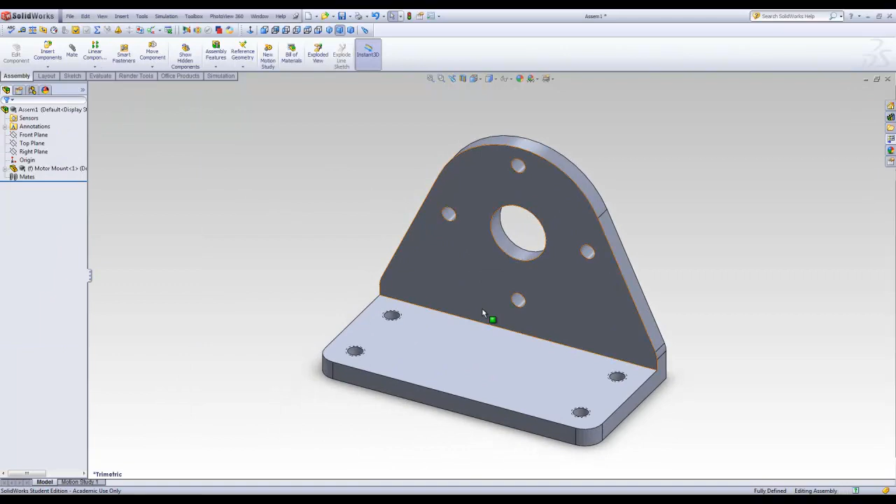Now what we're going to do is insert the motor by clicking Insert Components, Browse, finding our motor, and then clicking somewhere in the assembly.

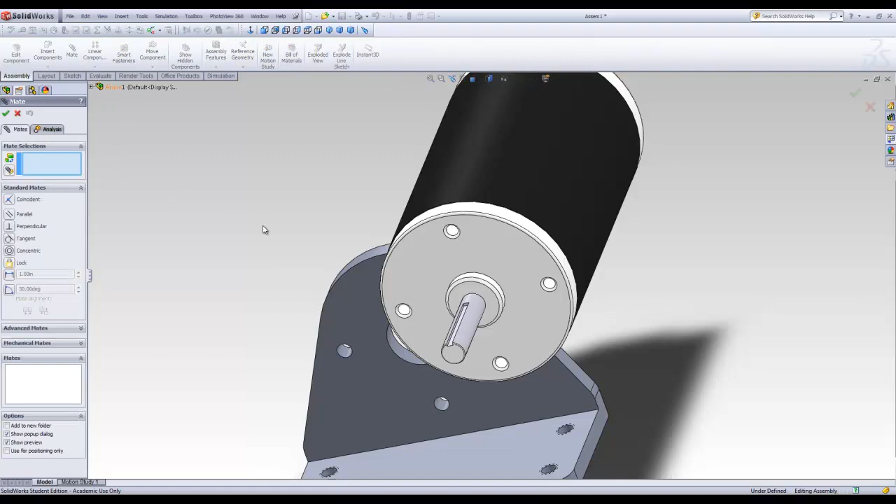In order to constrain our motor to one position, we're going to use mates. So click on Mate, and what mates do is join two bodies together. So if we click this surface and this surface, it's going to make it coplanar with each other.

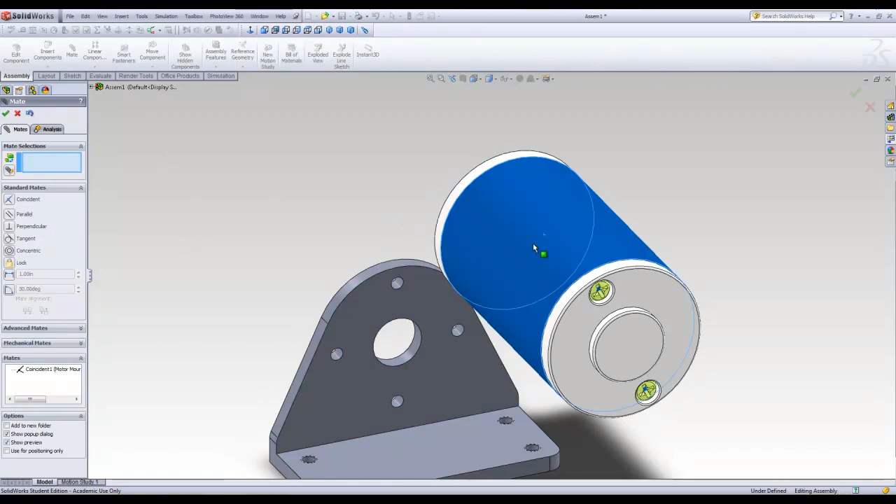You'll notice that our motor is going the wrong direction, so we want to hit anti-aligned, and that will flip it around. We want to hit the check mark, and now our motor is lined up much as it would be if we were actually screwing this into a piece of metal.

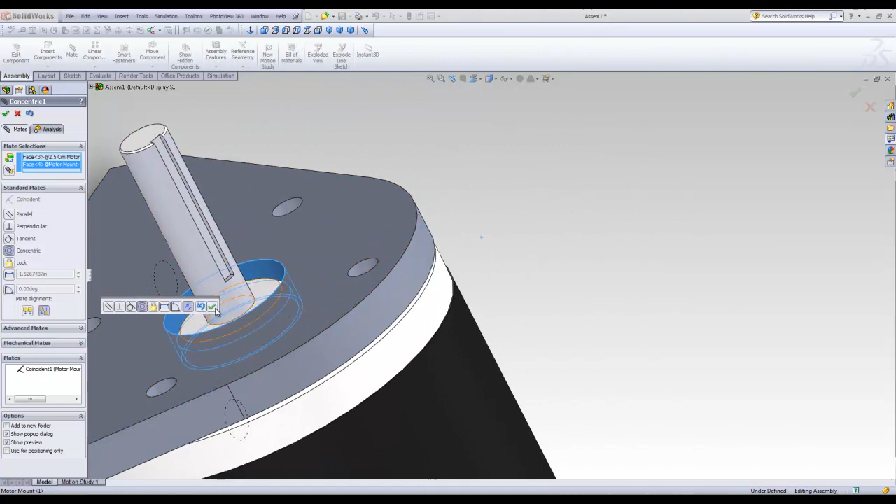To finalize the position, we want to click on the cylindrical surface on the boss on the motor, and then click the cylindrical surface of our center hole, and this will create a concentric constraint, so our motor is now centered with our mount.

To finish off the position, we want to click and drag on the cylindrical face on our motor until we get roughly lined up with our mounting holes. Then do the same thing again with the cylindrical faces and create another concentric constraint.

Our motor is now fully defined in our assembly, and it will not move. To finish our assembly, we need to add some screws.

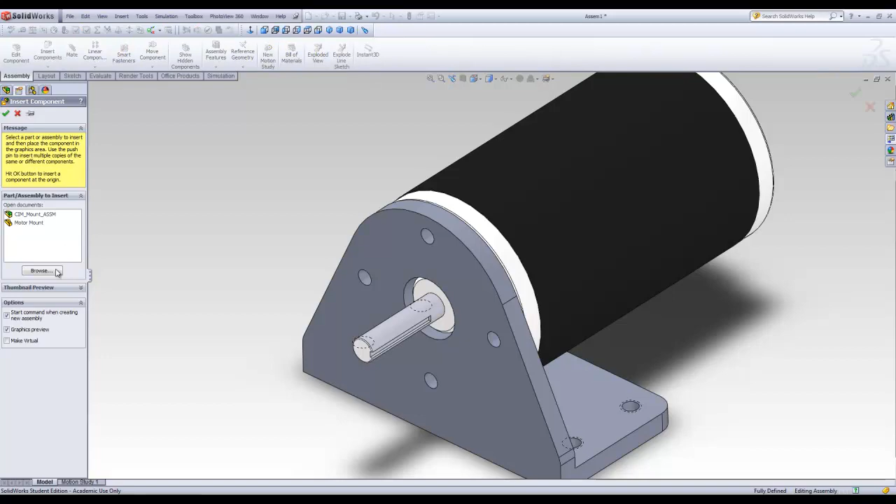So we're going to hit Insert Components and Browse again. Then we're going to add our screws. We need to click this push pin so that our Insert Component tab doesn't go away when we add more than one. So we're going to add 4 and hit the check mark and go back to Mate.

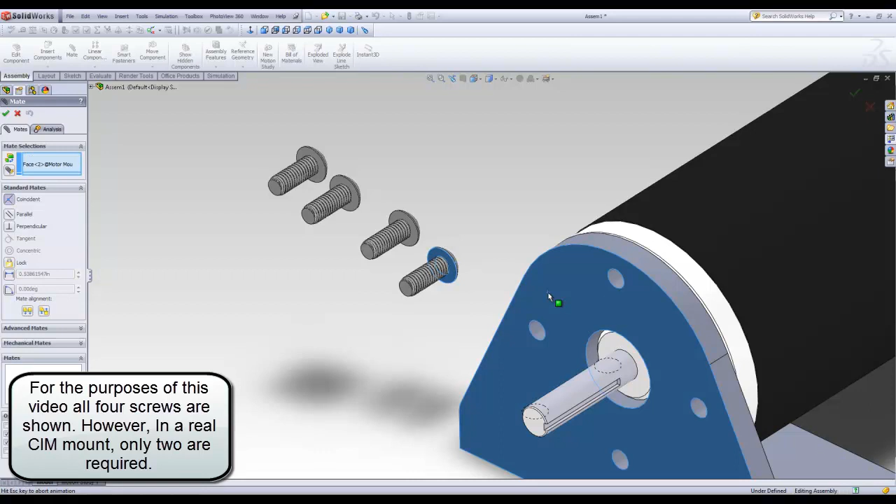Now what we're going to do is click on the bottom face of the head, and then click on the outer face on the mount, and then hit anti-align so it flips it around. We're going to do that 4 times.

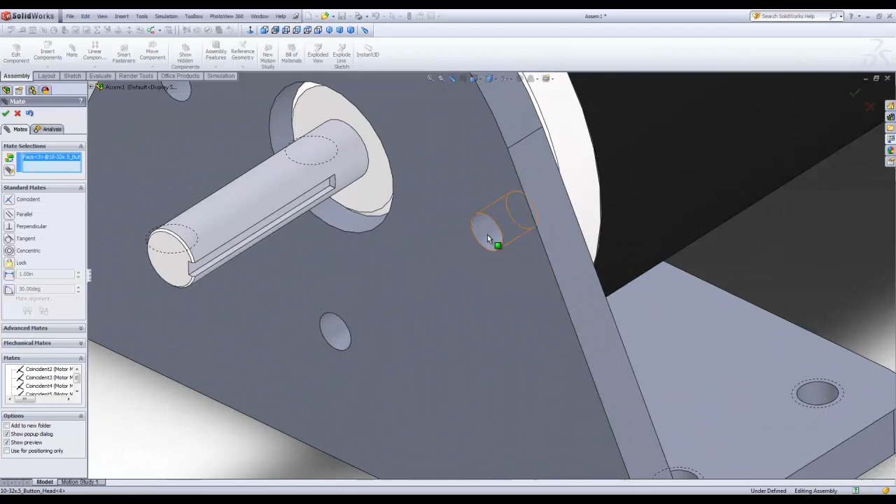Now all we have to do is click any circular surface on the motor and then line it up with a hole. And that will place our screws much as they would be if they were actually being screwed into our assembly.

Oops, I accidentally hit back.

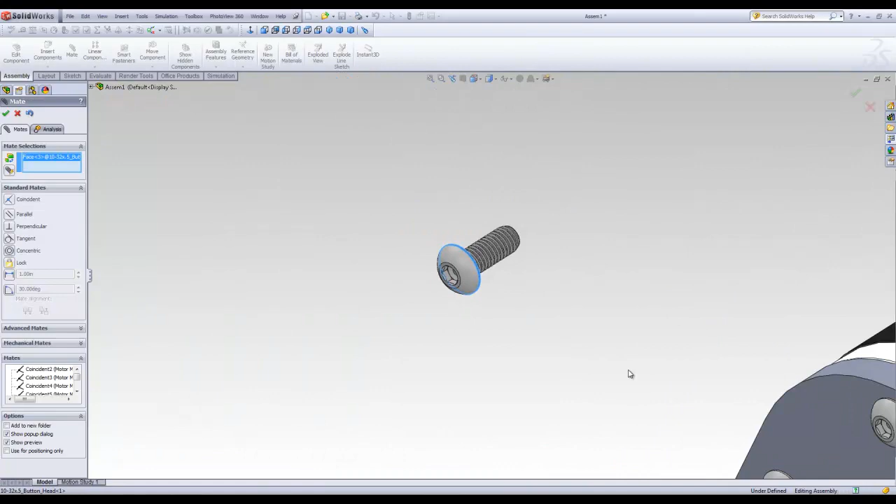So that's a completed assembly.